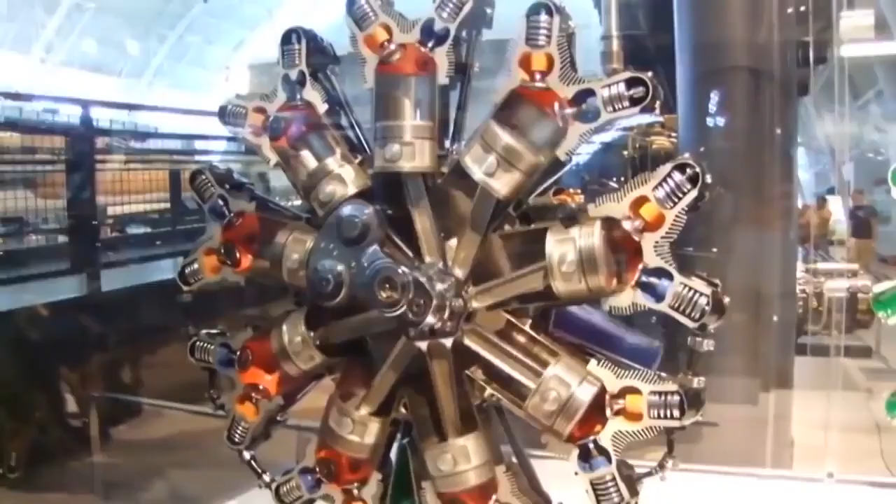Every day, more and more thinking people around the world realize that the technology of burning hydrocarbons is outdated. But most of these people still do not change their technological lifestyle and use old engines.

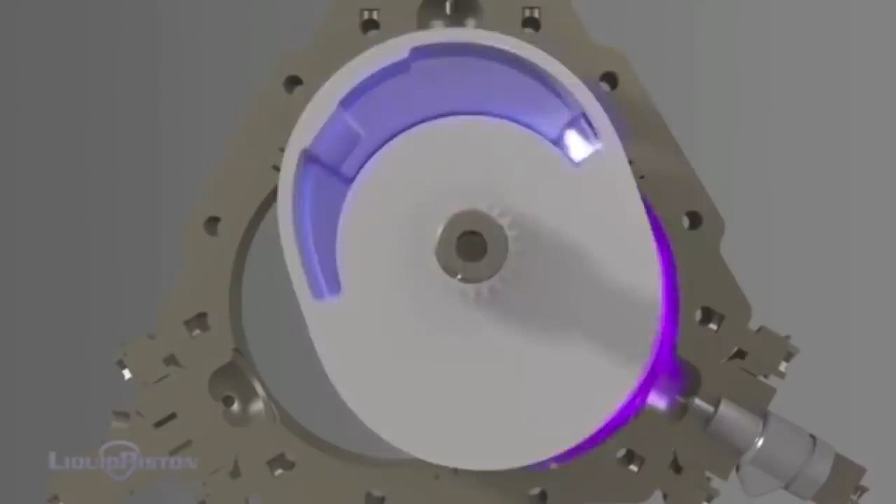How is that, you say? After all, more and more new engines are invented every year in the world, which means that progress does not stand still. This is true, but let's see what those engines are.

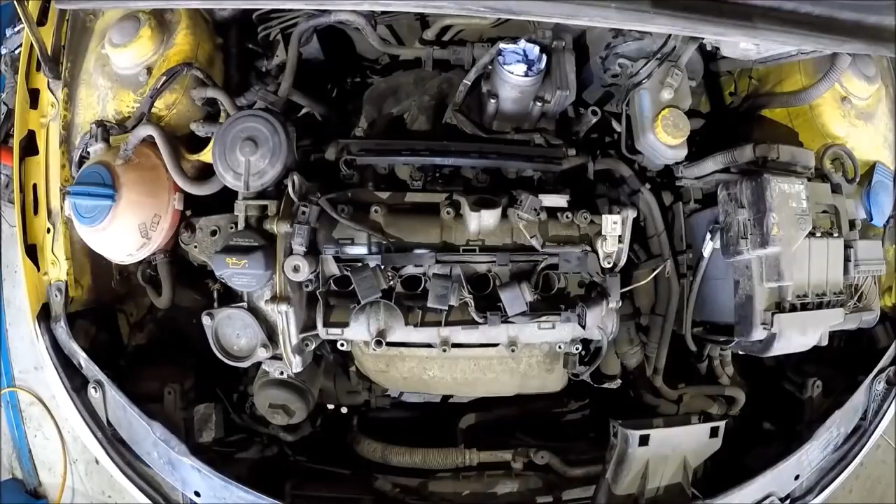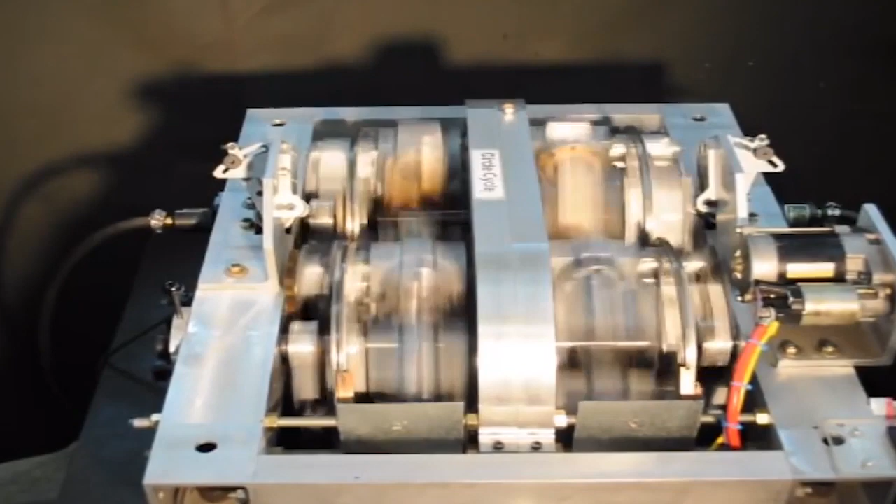For example, Circle Cycle is one of the most unusual orbital-type internal combustion engines. It means that instead of reciprocating motion, orbital motion is used in the structure. The engine has no cylinder block, no crankshaft, no separate flywheel, or intake and exhaust valves. The creators confirm that this project can lead internal combustion engines to a fundamentally new level.

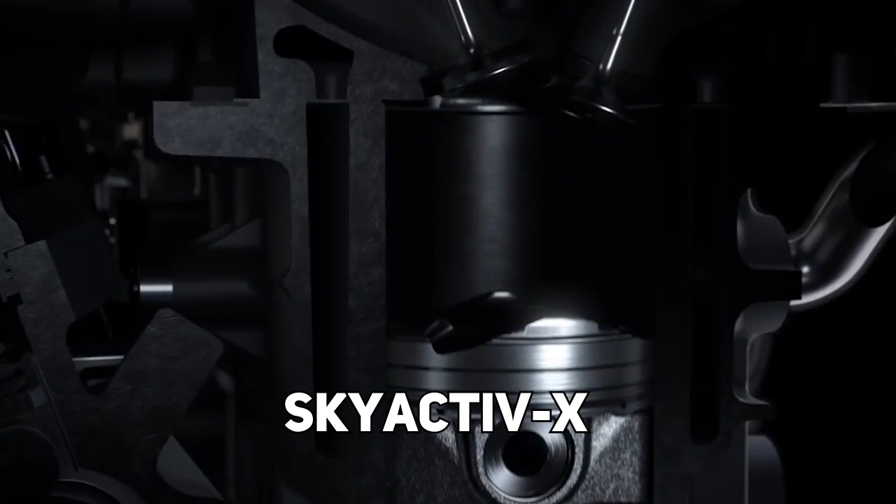Another example of an innovative engine is SkyActiv X, developed by Mazda. It operates on the principle of using a spark-controlled SPCCI ignition system. It is nothing more than a combustion method that allows gasoline engines to operate on compression ignition. In other words, Mazda has applied the diesel engine combustion methodology using the synchronization of a gasoline engine.

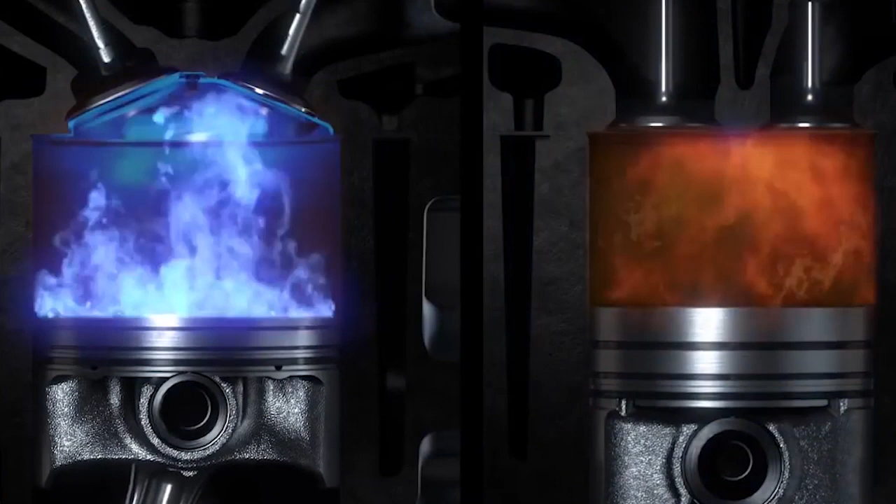The company is going to present a new Mazda 3 with the SkyActiv X engine already in 2019, and the Japanese promised 20% fuel savings compared to the current generation of engines.

Liquid Piston X engine is the name of a rotary engine. The money for its development was allocated by the U.S. Department of Defense. The rotor of the X engine rotates inside the chamber with stationary valves on a triangular frame, and 3 ignitions of the combustible mixture occur in one turn.

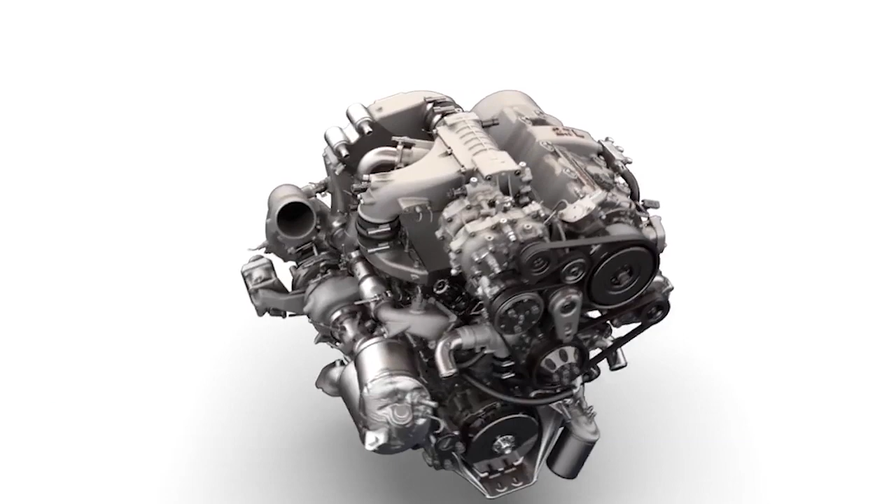At the North American International Auto Show in 2018, one more unusual engine was shown: the Achates Power 2.7. It uses a design with opposed piston movement. Emissions of this engine compared to similar engines are less than 30%, but its concept still cannot be called fundamentally new.

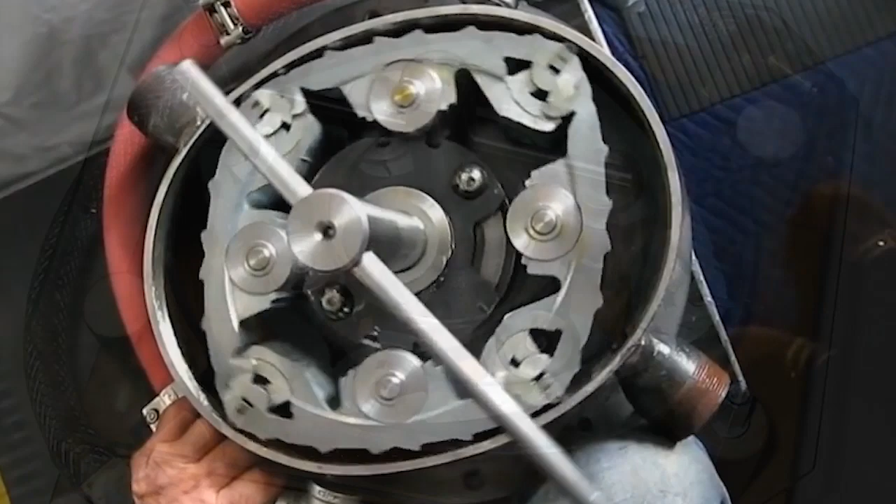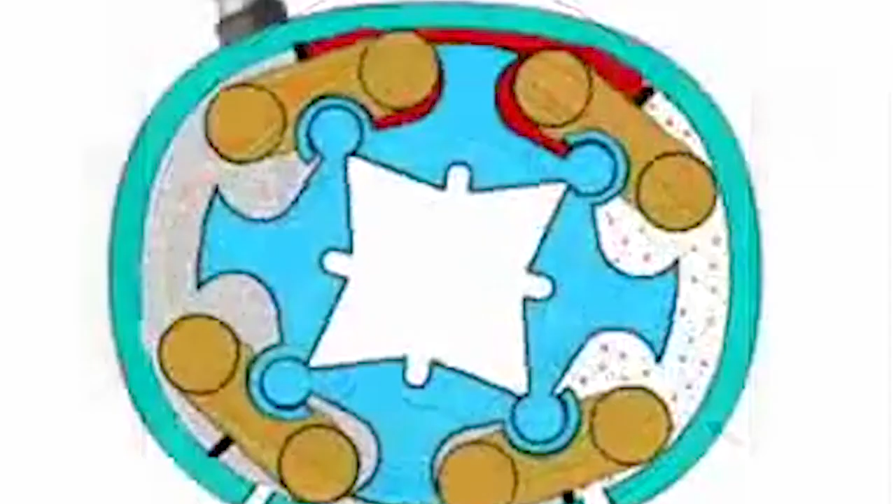In addition to the already mentioned engines, we managed to find another one, the quasi-turbine. The rotor of this engine is a multi-link mechanism that rolls around the central part on rollers. The quasi-turbine has been tested in some practical implementations and has proven to be more efficient than similar steam and air engines. But anyway, it's all the same, a rotary engine.

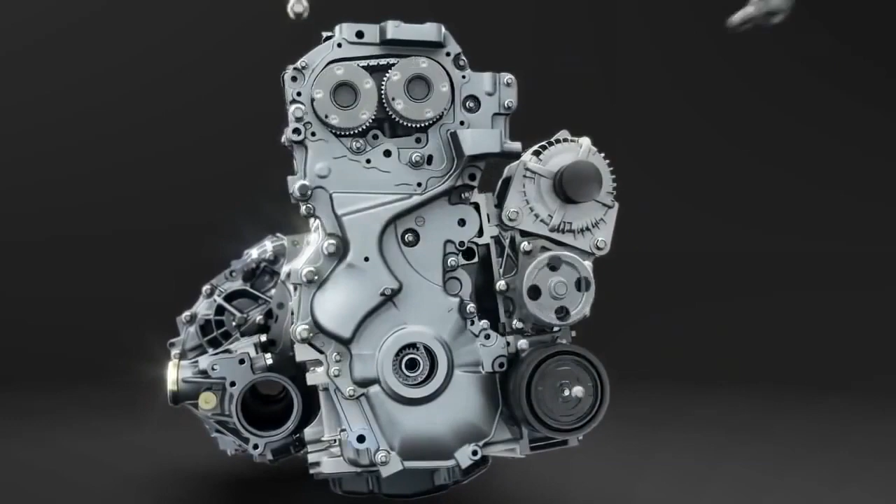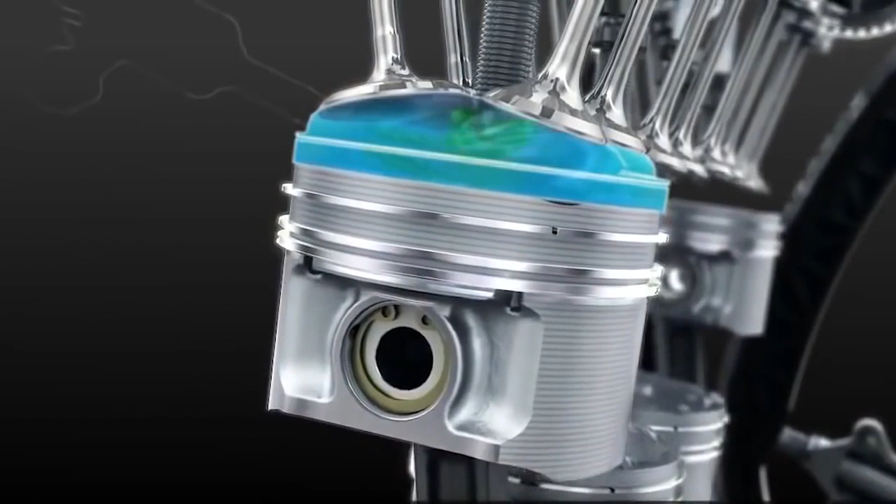What do you think all these engines have in common? Don't worry, special knowledge is not required because the answer is quite simple: they all use combustible fuel for work. All these seemingly innovative developments are nothing more than improved old technology, already known to us. So they do not solve the problems of ecology besides a slight reduction of emissions.

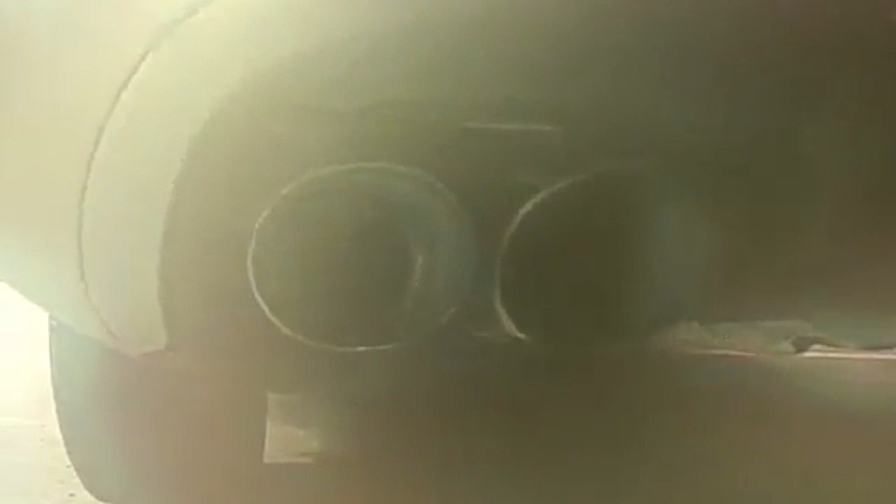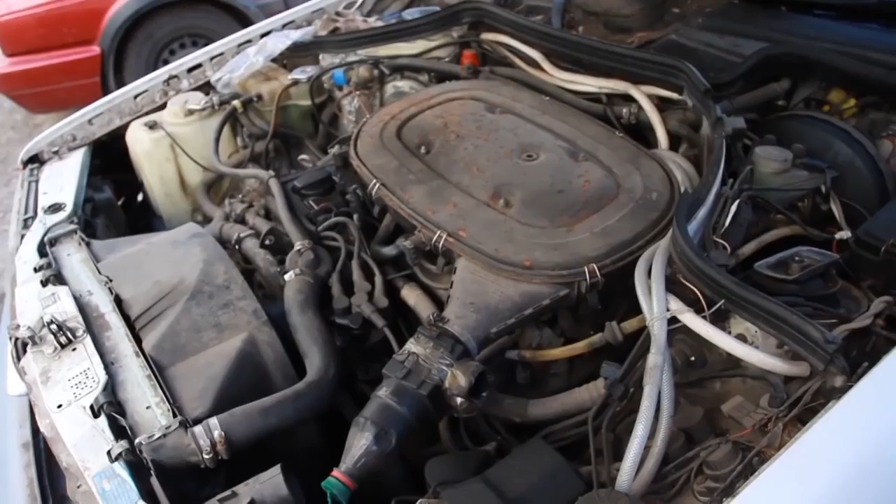But why is this happening? 90% of people would say that probably the engines that work without burning fossil fuels are fantastic and have not yet been invented. But after watching this video, you will realize that this is not true. Everything has already been invented, and it is not only about the use of solar, wind, and ocean tidal energy.

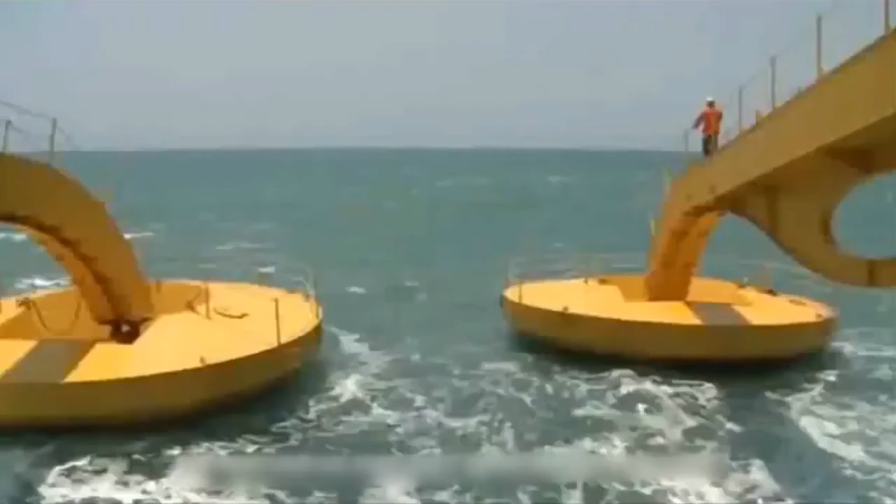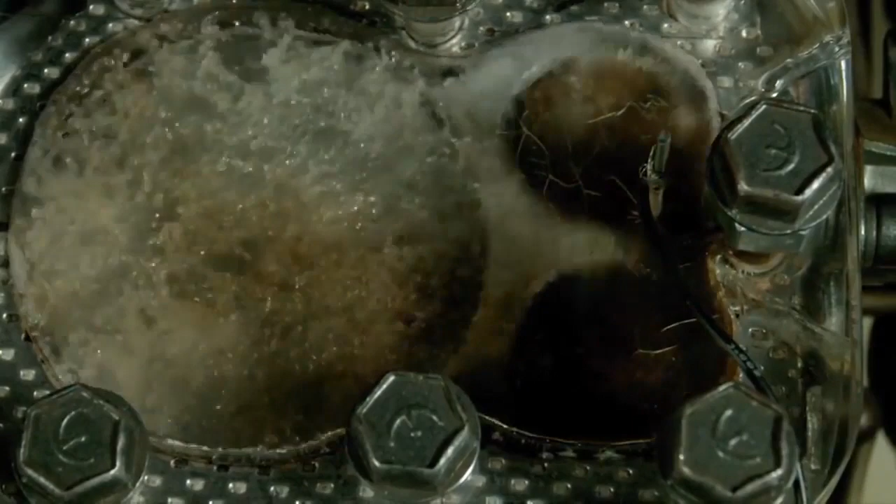There are technologies that are much more revolutionary, for which the burning of fossil fuels is primitive. One of these new advanced technologies is a car with a power plant that works by splitting and then burning a water molecule. People have been constantly inventing this engine for at least 70 years.

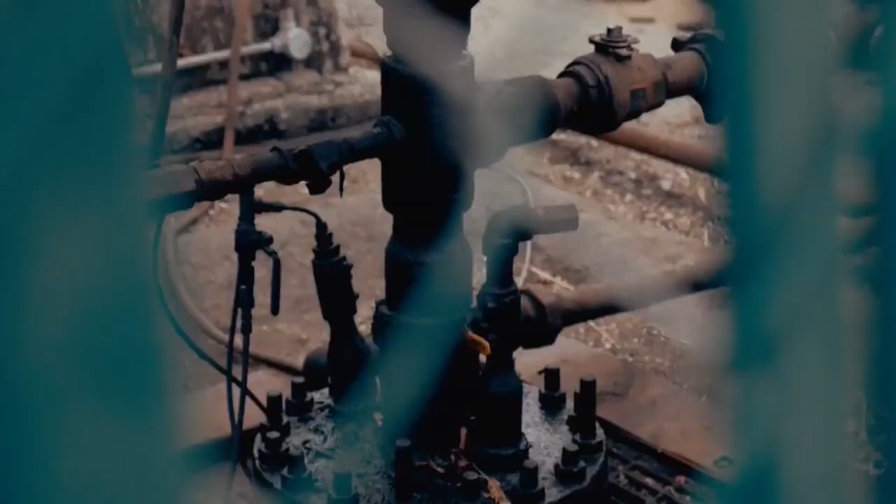But why do we still not drive cars using this engine? The awareness of the reasons for this comes to us only now, in the 21st century. All these inventions are not accessible to the majority of people because these technologies can completely change or even destroy the way the world's energy companies do business. From this, it becomes clear that such inventions are a threat to transnational corporations in the energy industry.

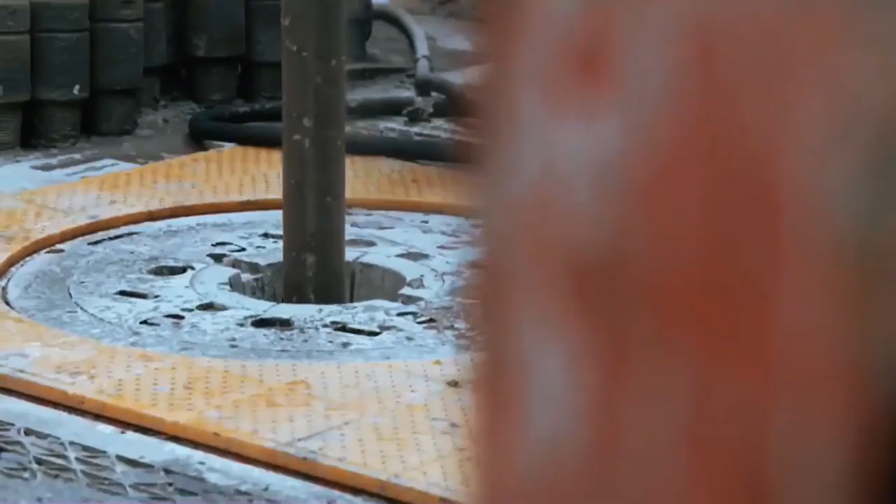Companies are constantly trying to hide research in the field of engines, but something leaks out and becomes revealed to the general public. One of such events happened 10 years ago, in 2008, when the Japanese company Genepax presented its water car at an exhibition in Osaka.

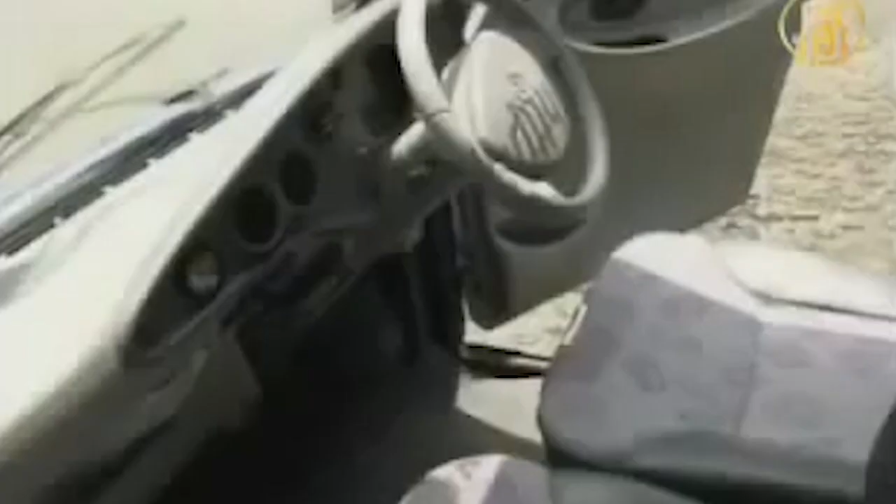No, this is not a car that can float on water, like cars in superhero movies. The machine uses water as fuel. It doesn't matter what you pour into the tank of the vehicle, soda, running water, or water from the nearest lake. A fuel-generating device breaks down any water into oxygen and hydrogen molecules. These molecules are burned up and the car goes.

Innovation and practical value of this car is fixed in patent companies around the world. Documents confirming this are in the files of the European Patent Office. But the only available thing to us about this Japanese wonder car is this short video. Thus, all you need to jumpstart a car is a liter of any water, river, rain, seawater, or even a liter of Japanese tea.

A report about this water car was made by one of the Japanese TV channels. They confirmed that as soon as water gets into the water tank, the energy generator begins to extract hydrogen from it, thereby releasing electrons. Thus, the electric power at the expense of which the car goes is made.

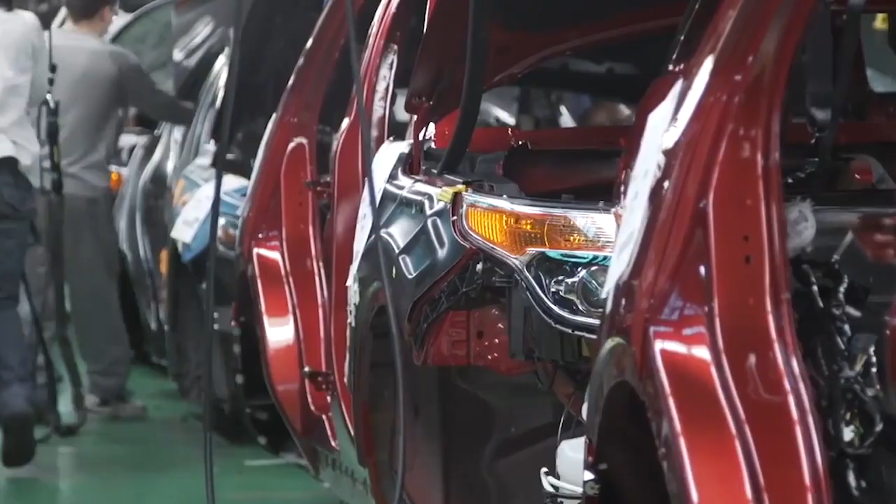Consequently, by 2018, the Japanese company Genepax should have been known to the world as much as the world's first automobile conveyor of Ford's factories. But now, in 2019, almost no one knows about this Japanese company.

How so? The thing is that just a year after the presentation of its innovative vehicle, the company went bankrupt and closed. The future of researchers from Genepax is not known.

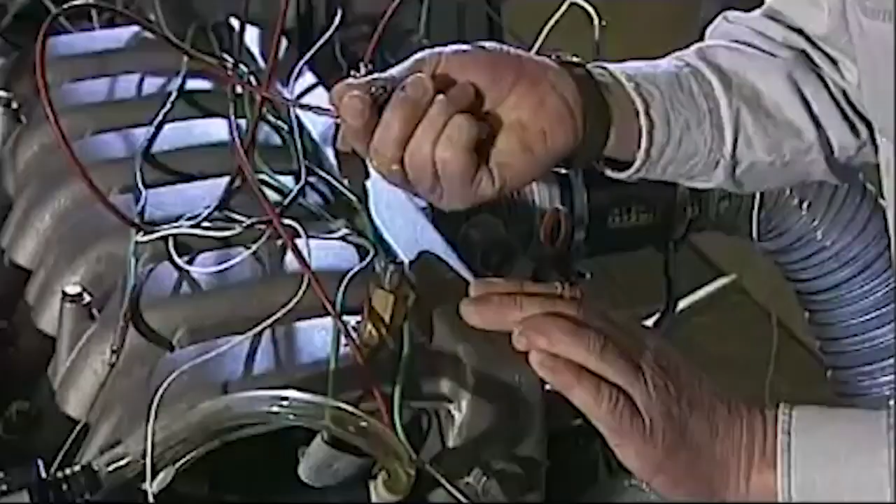But Genepax is not the only group of innovators who tried to promote the idea of using hydrogen fuel. Stanley Meyer is another ingenious inventor who acted alone. He invented and built a split water car by himself.

Somehow, the story of this man became accessible to the public when it came to a local news station in Ohio. Well, take a guess what happened to Stanley Meyer.

Maybe he was enriched by potential investors who gave him a lot of money to build cars. Or maybe he founded his company similar to the Japanese Genepax, which began a successful production of cars on hydrogen fuel. Unfortunately, not at all.

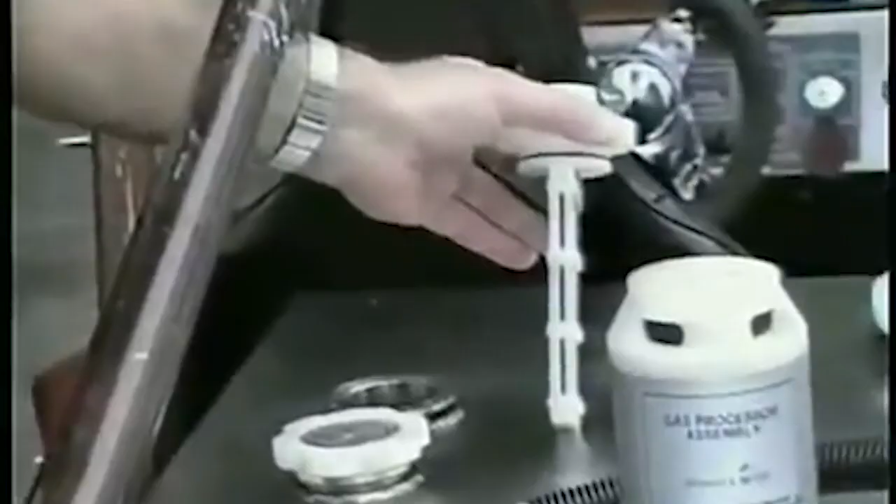First, after the appearance of Stan and his videos in the news, some experts began to call Stan a swindler. And soon after that, he went to a restaurant in a parking lot, drank cranberry juice, felt bad, went outside, and died. The results of his research are gone.

However, more and more researchers explore the possibility of full value use of water as fuel. However, they do it without publicity, as they are afraid of the unsuccessful experience of predecessors.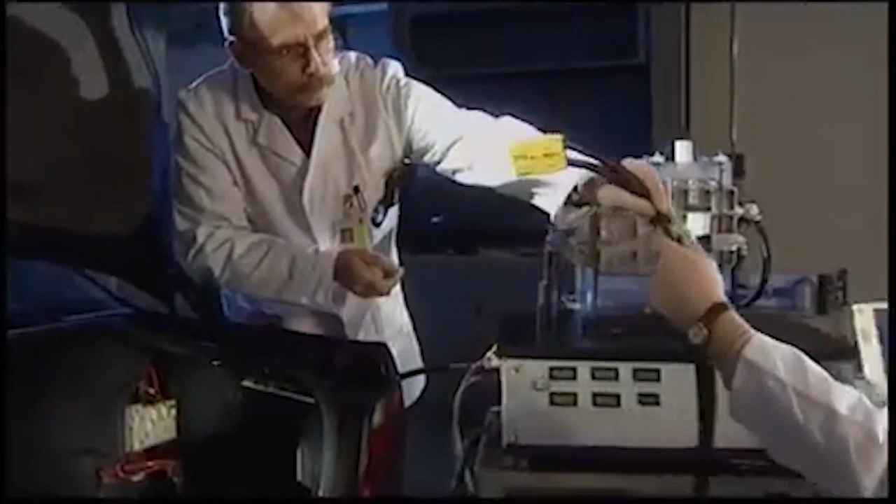But these researchers know that water is the ideal source of fuel. A water molecule consists of 2 hydrogen atoms and 1 oxygen atom. And when electric current passes through the water with certain parameters, it splits up into its constituent elements. Oxygen and hydrogen burn in the engine, and the energy output is 2.5 times higher than when burning gasoline.

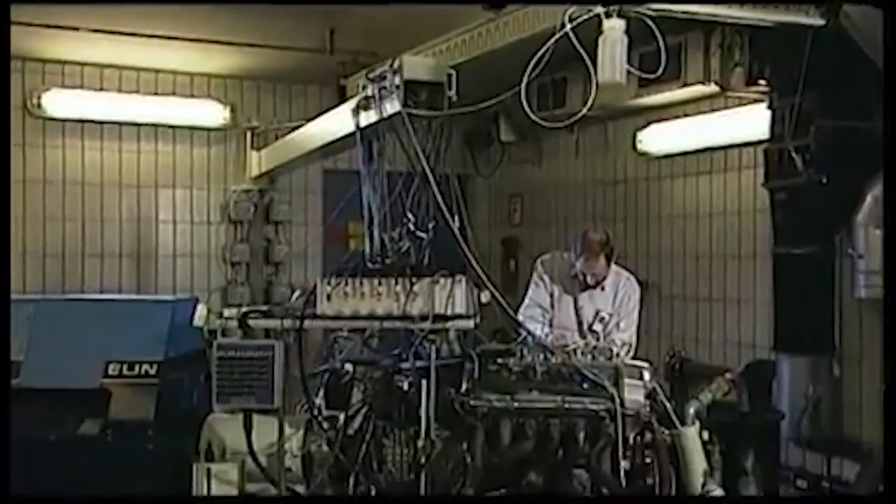In this case, the product of combustion is water vapor, which returns water back to the atmosphere, which is absolutely safe and environmentally friendly. Virtually any internal combustion engine with little or no modernization will be able to run on hydrogen.

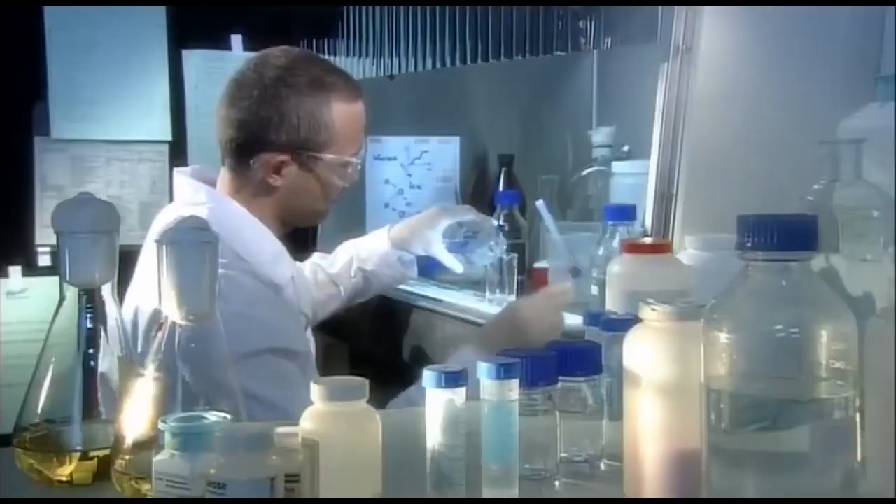Not long ago, researchers from Virginia Tech were able to extract hydrogen energy from water in another way. They found that xylose contained in plants breaks down water molecules as well as electricity does.

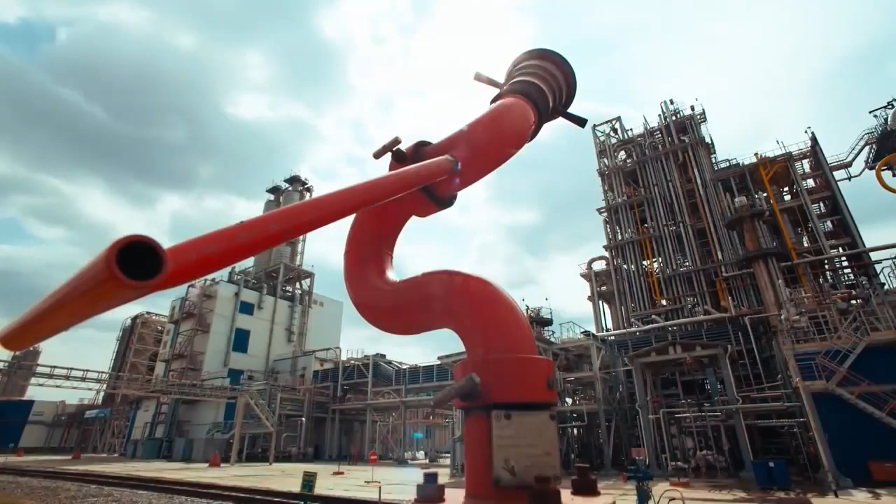But what to say about such technologies when even simpler mechanisms that work not on combustible fuel are not needed at all to those who own oil and gas companies?

John Rockefeller, who became a billionaire due to kerosene trading, at one time tried to prevent Thomas Edison and Nikola Tesla from developing with direct and alternating current. Unfortunately, not much has changed since then.

But we have one valuable advantage compared to the Rockefeller era. Nowadays, the global network, the Internet, allows any information to be distributed immediately, and researchers can maintain anonymity by publishing their discoveries.

Of course, certain segments of the Internet are carefully monitored and checked by special services from different countries, and corporations can afford special departments to track new inventions and suppress the danger. But when they try to forbid something, the so-called Streisand effect works, and the information gets even more widespread. The main thing is to have time to see and save the materials before they are deleted.

This is exactly what happened with the Testatika fuel-free generator, whose disks are capable of rotating constantly due to the forces of electrostatic interaction. But you can know more about that in our other video.